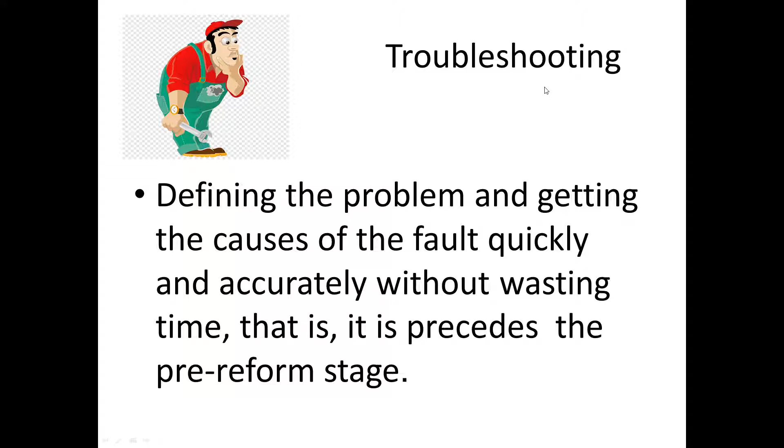You have to make trouble finding or troubleshooting. This is important. Some people say this is a complicated or difficult thing. It's not difficult if it's systematic, or if you use the methodology method. It will be very easy. Step by step, you can be a foreman and reach the troubleshooting easily.

I give you an example. This man complains our engine emits black smoke. If you see the reasons for black smoke in a diesel engine, you can find more than 11 reasons, but I write here only 11 reasons for this fault.

If the man deals with all 11 methods, he will not be an economist. Why? Because these 11 processes need time, maybe 5 or 6 days. But you cannot imagine that a man will earn $15 for a job, and stay 7 days to repair one fault. This is crazy. So you must check one, two, or at maximum 3 reasons for the fault, and then repair it. It will not take time. In this case, you will be an economist.

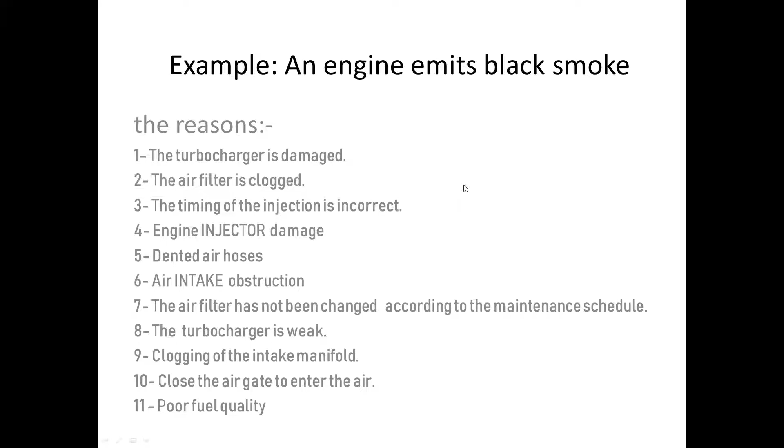So in this video, we'll see how to reach the right reason for the fault, and minimize time, and minimize the money. The problem here: many technicians, especially new technical men, say, I cannot.

It's hard for me to find the fault. It's the responsibility or duty of the foreman. Say no. It's not true, because this video, you will discuss how to find the fault yourself, and you will be like the old technical man.

Why? Because the process is all the process. This man, he knows all the processes that can be done, and he practices in the training center or by himself, or learning from anybody. Suppose the same: this man can adjust the valve, this man adjusts the timing, this man changes the oil filter and air filter and the oil, like this man. All these practices can be done. This new technical man can do all the practices that can be done by this old technical man.

But the difference is, this man can easily reach the troubleshooting in less time. So in this video, we'll teach this man how to find the troubleshooting or fault finding easily with some methods. But here I give you general advice before working with the troubleshooting.

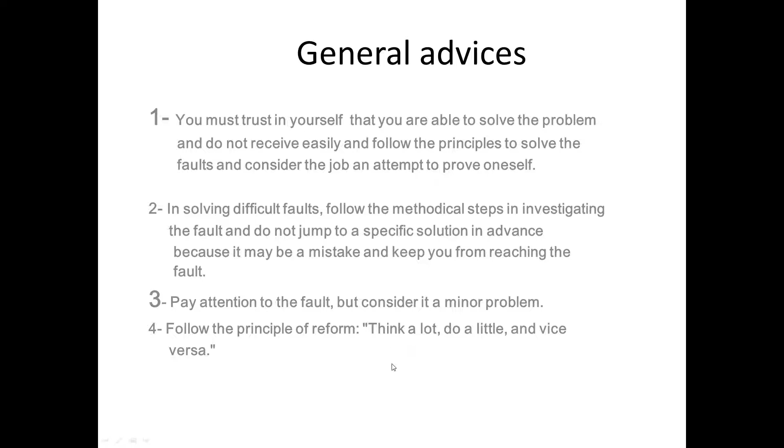It's necessary to know the company's laws or the customer condition. The repair contracts must be scrutinized. Why? Because you are an economist, you have to follow the company's law and take care with the contract itself. So it's important. Sometimes the engine makes black smoke and the company cannot afford the cost of overhaul. So if you make overhaul, you will make a problem for the company and yourself.

Not all faults require high technique detection devices. Really, sometimes maybe one engine is stopped, and it's only need to bleed air from the fuel system, and the engine will work. It does not need high technical skill. But remember that mechanics need tools, because tools can help the mechanic well, and detection devices make it easy for you to reach the fault.

It's very important. Like if the engine needs overhaul, if the engine burns oil, I want to ask myself, how can I decide to make overhaul or not? If I have an oil pressure gauge, I can see if this needs complete overhaul or half overhaul. So it's important to have tools. Tools are very important. Also, when you tighten a bolt, you need a torque wrench.

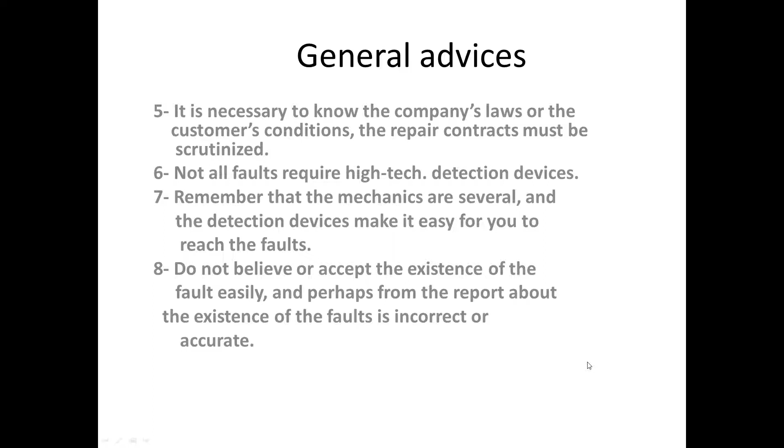Number 9, the equipment or machine is like a person. It is necessary to know the sick history of it. Any doctor, if anyone goes to the doctor, asks him, what is your history? So you can see the history can explain many things to the doctor. Likewise, for the equipment, the mechanic must know the repair history of the equipment itself, because the maintenance fault history will help the mechanic reach the reason for the fault itself.

Learn about the location of the machine agent or machine repair company, phone number and address, because sometimes there are bulletins reaching the machine company from their agent, and maybe there are modifications, something like this. Sometimes you need information, because not all mechanics have all information about his machine, so he can know or take some advice, or ask about the parts found or not. So he must have the phone number or address for the machine agent.

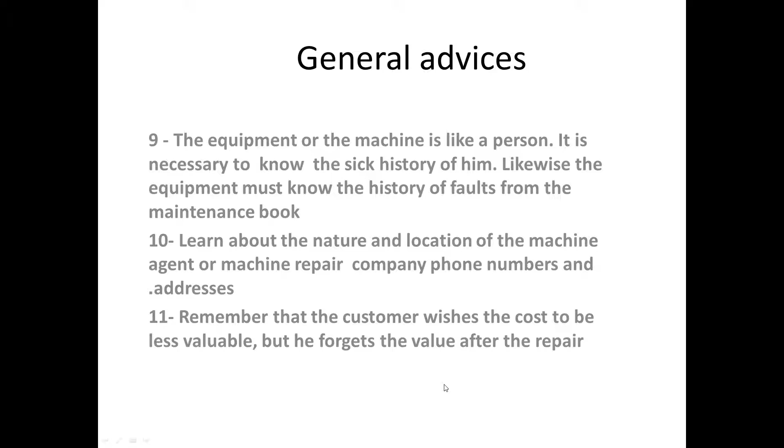Remember that the customer wishes the cost to be less, but he forgets the value after the repair. You are responsible for the repair. No one can give you an excuse after repair, even if the owner, the customer, paid much or little. So you have to use original parts, and you have to make good work. Don't concern yourself with the cost.

It's very important. Let us see the fault investigation methods. There are two methods. First, the old one, the right and wrong approach, trial and error. Second, the logical approach. Mechanics in the world use this one. Maybe they don't know how to use the logical approach, or sometimes they look for work, because maybe the machine needs only small work, and they make it take many times to earn much money from the customer.

So what is this method? When you go to him and the engine has black smoke, he can say to you the engine needs to change the air filter. Okay, if you change it, oh it's needed, adjust the injector. Oh not, then it's needed to adjust the fuel pump and make overhaul for it, and then the repair happens by itself eventually. This method is very bad because it wastes time, effort, and a lot of money from the customer itself. So your company will be in a bad position.

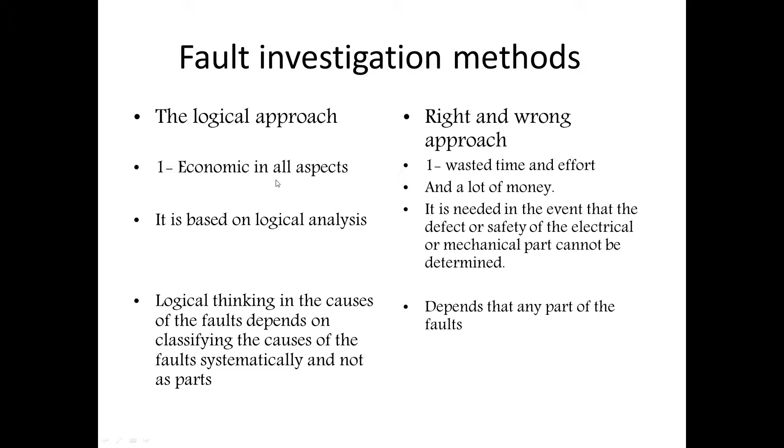The logical approach has 7 steps. First, the methodological logical approach depends on eliminating faults that have many reasons. So in the logical approach, I eliminate some reasons to reach one or two, and examine it, maximum three reasons for the fault itself.

What do I mean by knowing the system? When you meet a new friend, you ask him where he's from, his name, his career. You ask him about himself, because any question has a meaning. In the engine itself, it's all the same.

Study the technical manual. In this case, study the technical manual. For example, black smoke - one of the causes is the turbocharger. If the turbocharger is broken or weak, the engine will emit smoke.

In this case, if there is no turbocharger, I omit this reason. Also, some engines have a shut-off valve on the manifold itself, so if there is no shut-off valve, I will omit this. Step by step, I will make something - so I need to know the accessories or auxiliary equipment with the engine.

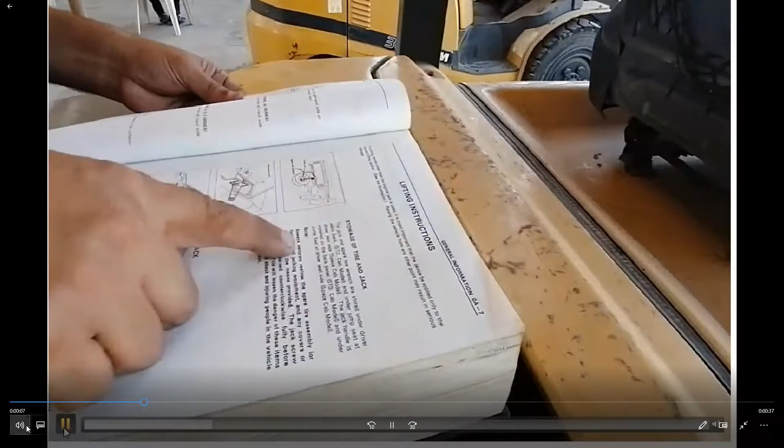Study the equipment maintenance book. You have to study the maintenance schedule to govern or estimate whether the engine's fault is a maintenance reason or not. Here, know the system - I can show you something like this. In this video, you need to look at the grade of oil, the specification, the spare parts - everything needed to know about the engine.

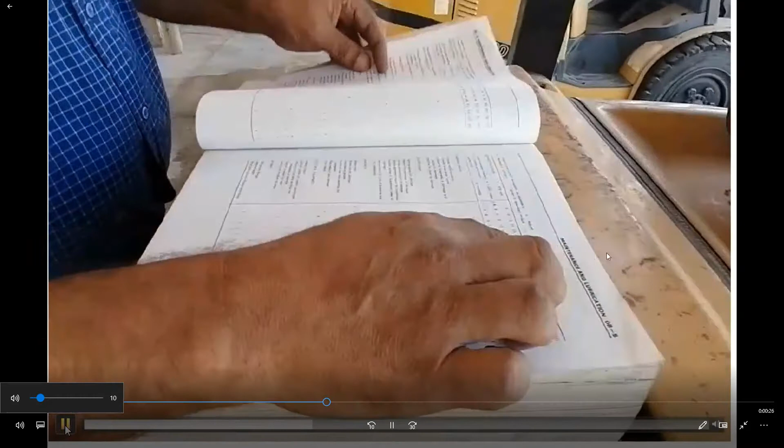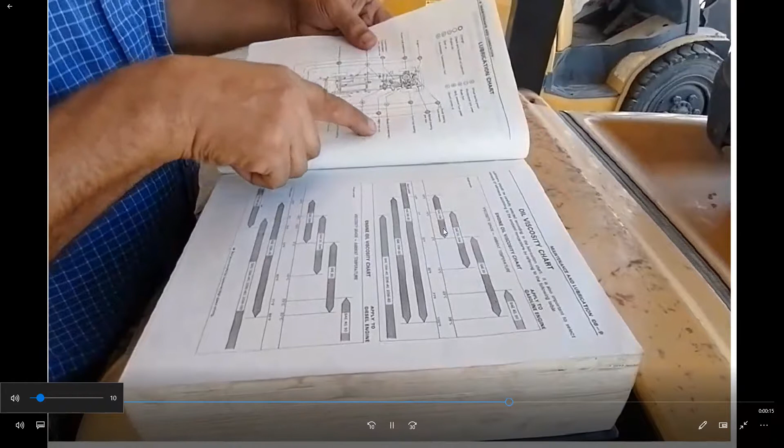See if there's a turbocharger or shut-off valve, all the auxiliary equipment - give all information to know the machine, what the machine has. This is the grade of oil needed; maybe the grade of oil used is not good or not suitable for this engine, maybe that will be the reason. So you have to know the system - this is very, very, very important.

Second thing: ask the operator. It's very important - if you want to discover whether the mechanic is good or not, listen to him. If the mechanic asks the customer a lot of questions, that means this mechanic is a good man, because you want to reach the troubleshooting in less time and less expense.

There are many questions depending on the type of fault, but there are some fixed questions - every fault has many questions. Like when the engine is heating, I have to ask the customer some questions. If the engine is not working, I have to ask some questions. And the aim is to determine if the smoke is black, white, or blue. There are many questions I must ask him, but there are some important ones.

For every fault: when did the fault begin? Because some faults begin suddenly, and some need time to develop gradually. What are the conditions of the fault? Some faults can happen under certain conditions and cannot happen under others.

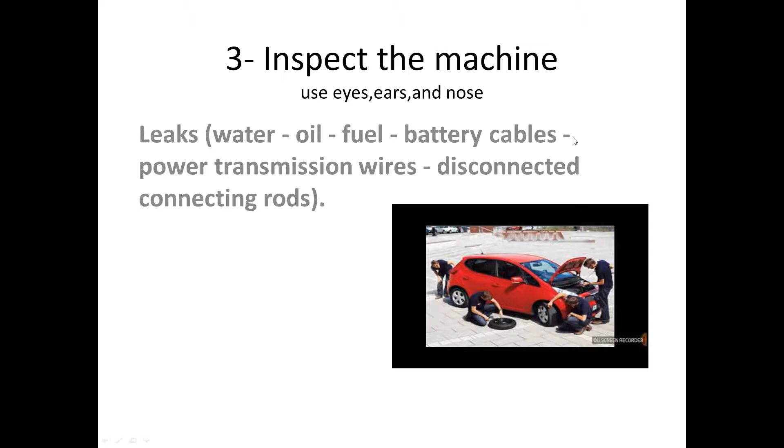So this is important, you have to go around - first of all, go around the equipment itself, excavator or heavy machinery or car, whatever. You have to go around to see unusual or bad things, which may be the reason.

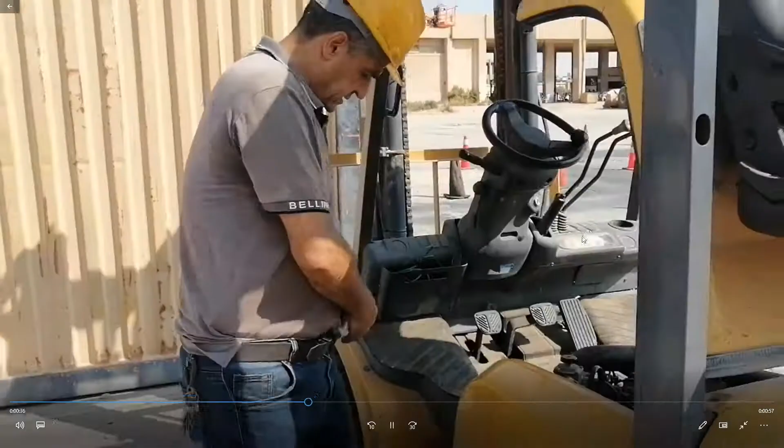Here, inspect the machine - I'll show you the method. I check the tires, everything. You have to check and give the machine what it needs: oil measurement, many things. Give it oil, adjust the oil, adjust the coolant, engine oil, transmission oil, torque converter oil. See all cables, if the connection is good or not. See if there are leaks, check the lights, if anything is broken or unusual - check it using your eyes, your nose, your ears to see if something is wrong or not.

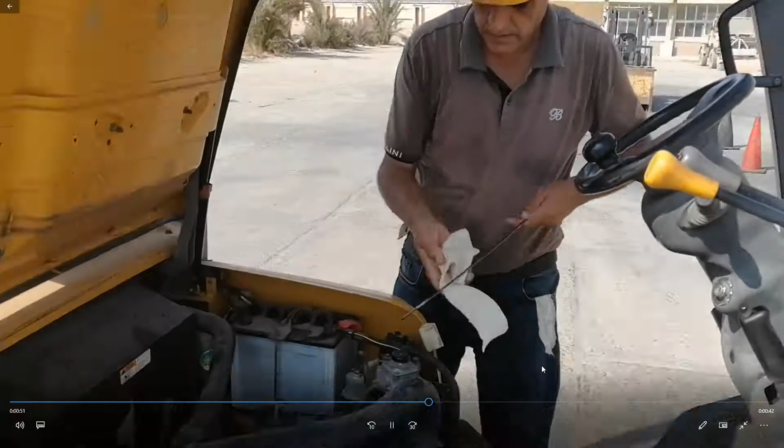First of all, to repair any machine, you have to adjust all coolant - maybe this is the reason. One day, someone complained that the oil pressure lamp was lit. So first I checked, removed the dipstick, and checked the oil level. I found there was no oil in the oil pan itself, so I filled the oil and finished the problem with a good repair. It's easy, so you have to check.

Operate the machine, number 4, operate the machine. The important thing is operating the machine yourself to make sure there is a fault. This is important, you can see if the customer is right or not, if the fault is found or not. This is important - you cannot look for something you don't see.

Check the meter readings, this is important. When you start the engine, check all meters, they must be in good condition - heating, fuel. There's fuel in the machine, and the temperature gauge, oil pressure gauge, all gauges in the machine itself - you have to check them. Maybe it can explain to you the reason for the fault itself.

Number 3, listen to the sound produced by the equipment. You're running the engine, and you see if there's some sound that's not good, that's unusual - maybe that's the reason.

Try to notice any new smell. If there is a strange smell, maybe this is the reason. If you feel there is burned oil, maybe the leakage of oil on the exhaust and the exhaust manifold makes a bad smell. You can check and note the presence of leaks during operation.

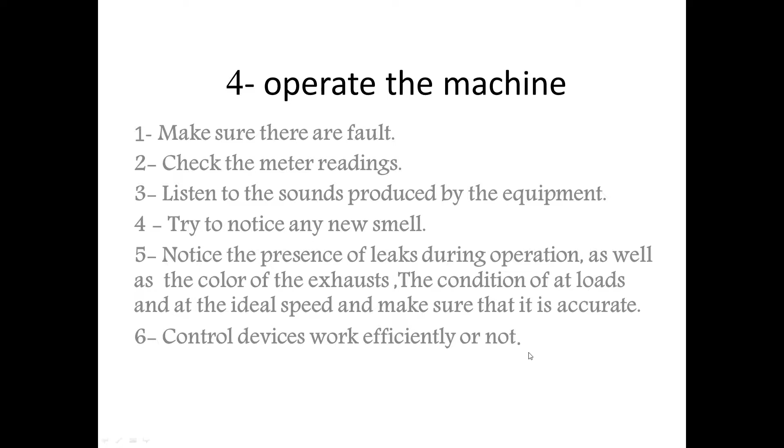I have to check myself and run the engine, and see all the panel readings - the temperature, fuel, oil pressure - and make an operation test for every part of the machine. Lift or lower the pedal to see the exhaust or not. Make many tests which can help me discover the fault itself, to find the fault itself.

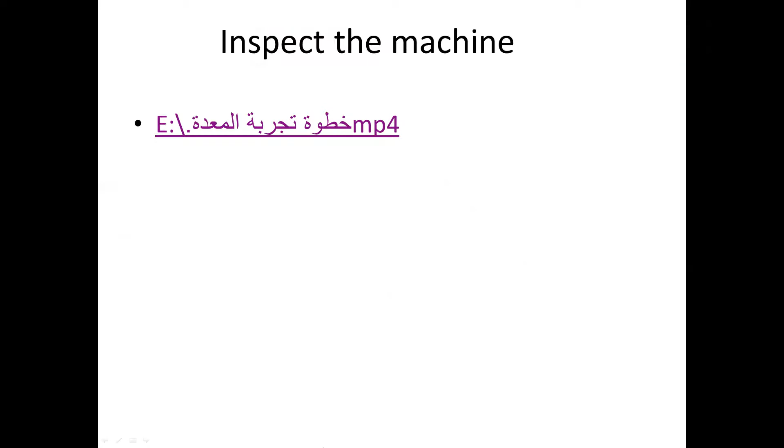This is very important - number 5, list the possible faults, which I put on the first page. There are 11. My problem now is black smoke. I write 11 reasons for black smoke. I make a list for it.

Then reach a conclusion - look over all the possible causes and decide which are most likely and which are easiest to verify. This is very important. Reach a conclusion here - it must be 1 or 2, maximum 3 reasons. How can I get it?

By deducting the possible conclusions minus the reasons which I eliminated in step 1, 2, 3, and 4. In step 1 I eliminate some reasons. In step 2 I still eliminate some reasons. Step 3 I eliminate some reasons. Step 4 I eliminate some reasons. So in this case there will be 1 or 2 reasons for the fault itself, maximum 3 reasons.

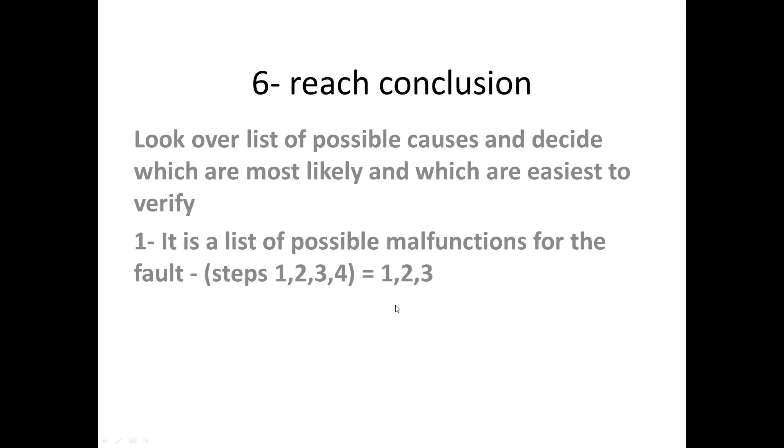Number 7, test the conclusion. All 7 steps - it's not taking money, not taking much time. It's easy, it will take little time.

I will give you an example. Engine emits smoke, which I talked about. Here there are reasons - I have to reach 1 or 2, maximum 3 reasons. I will check it. Look here, the turbocharger is damaged. From the system knowledge, I can see if there is a turbocharger or not. If there is no turbocharger, as system knowledge says, step number 1, I eliminate this one. So the remainder will be 10.

The air filter is clogged - knowing the maintenance schedule. If I go to the maintenance schedule and see the filter is cleaned in the maintenance schedule, I can eliminate this one.

The timing of injection is incorrect - this is a possibility, but this one can be told to me because it can be done by the mechanic. Engine injector damage - maintenance schedule. If I make the maintenance from 2 months, okay.